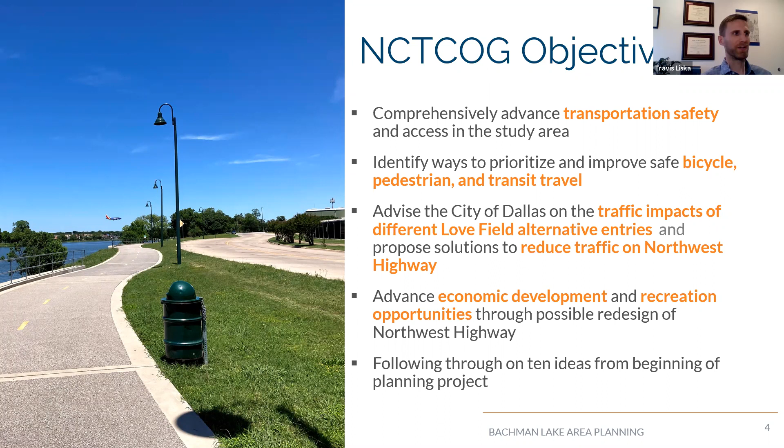Thank you for that introduction, Michael. You really set up a lot of the presentation well.

Today we're going to cover a little bit of that background on the 10 that Michael mentioned, as well as talk about where we've been with the project and where we're going.

We're really going to focus on the public engagement opportunity, a summary of the comments we received from an online map exercise that we made available earlier this year. And as Michael mentioned, we're going to talk about roadway improvement ideas related to possible alternative entries for Love Field. And then we're going to hopefully have time for a good conversation and discussion.

So to start off with our background, we began this planning project almost a year ago. As Michael mentioned, we had the October meeting where we laid out a lot of the items we're going to address. Then we began a public engagement process with an online survey that members of the community utilized and gave input on.

We did more public engagement through an interactive map and mapping exercise that was available this spring. And as you'll find out this evening, our roadways team has been working on modeling analysis related to possible scenarios related to Love Field, which they've been working on this summer, and that's what we're here today to present.

So you heard the mention of the 10 focus areas from October. These are those 10. We want to show you today that we are following through on these items, or will follow through soon. So some of the content from these items will be covered today.

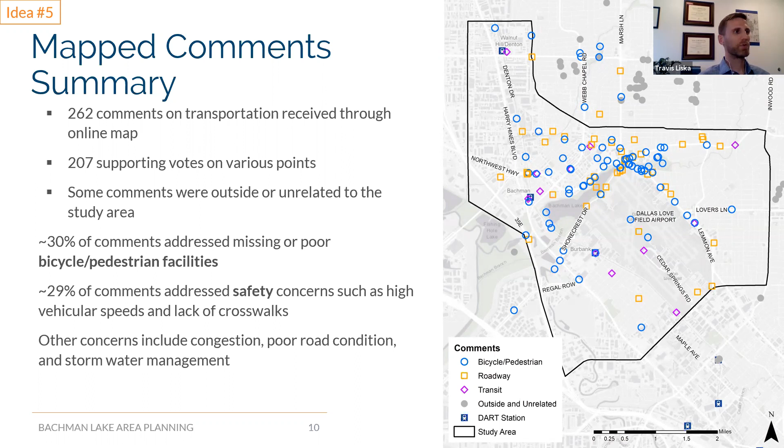So we're going to go into just a few key areas that I think were really the focus of the comment and conversation through the mapping exercise.

The first being the Bachman neighborhood, where, as you'll see from our comment counts that are displayed here - and again, I'm not going to go over every single comment, but rather we will make this presentation available online along with a report that has all of the comments available for you to read at your leisure. But the main takeaway here is really an indication of the need for better bicycle pedestrian facilities, and again a concern over how to safely access them, especially as it comes to the ability to cross roadways where there is a lot of traffic. So those were noted for this area in particular.

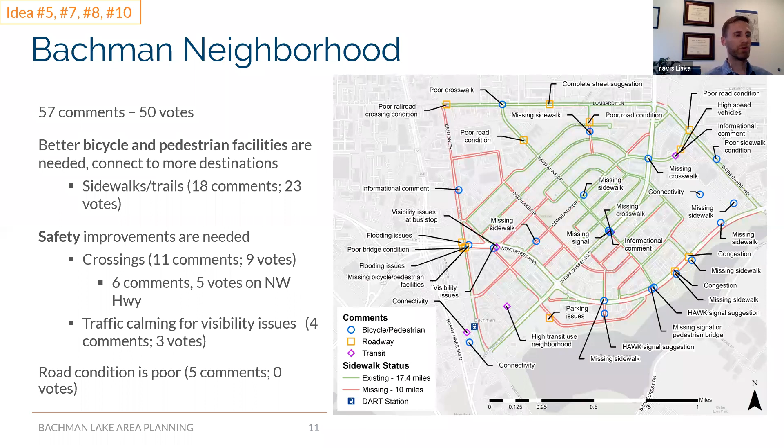And then I want to shift over a little ways to the east on Northwest Highway, where you'll note that there was a lot of comments on missing sidewalk especially. With Northwest Highway having a lot of fast moving traffic, comments also indicated a concern over an ability to safely cross and navigate around that roadway.

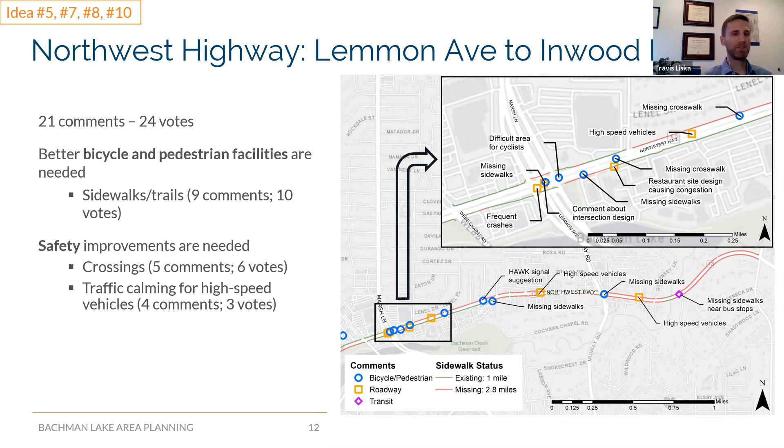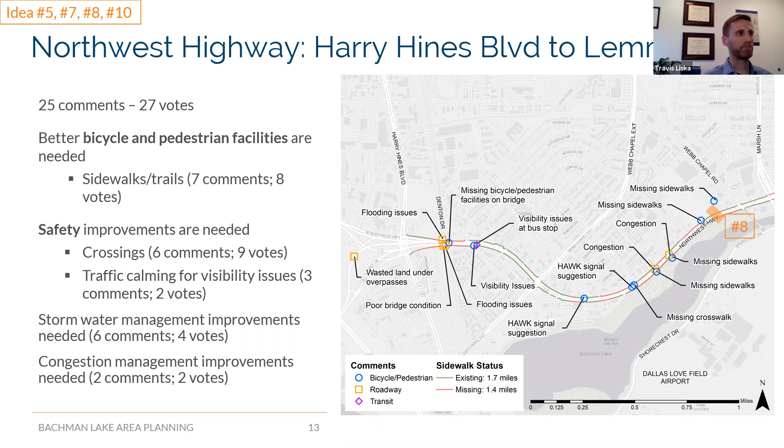You're going to hear from our roadways team on our item 3. Item 3 is this question of access to Love Field, so this is an important location - keep that in mind. We have noted these comments, and we're going to continue talking about this location later in the presentation.

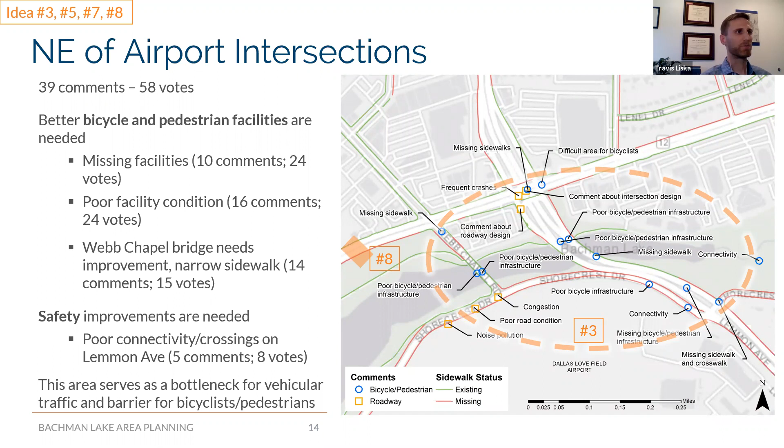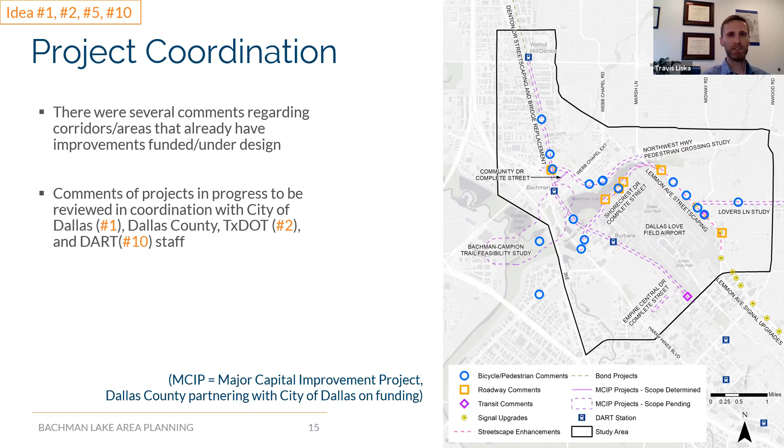I'd also like to note that our goal is to coordinate with our local government partners, obviously the city of Dallas, Dallas County, TxDOT. We received a number of comments on locations that relate to projects that are in some degree of progress with those different agencies, and we're going to take these comments to them and coordinate with them as needed as well.

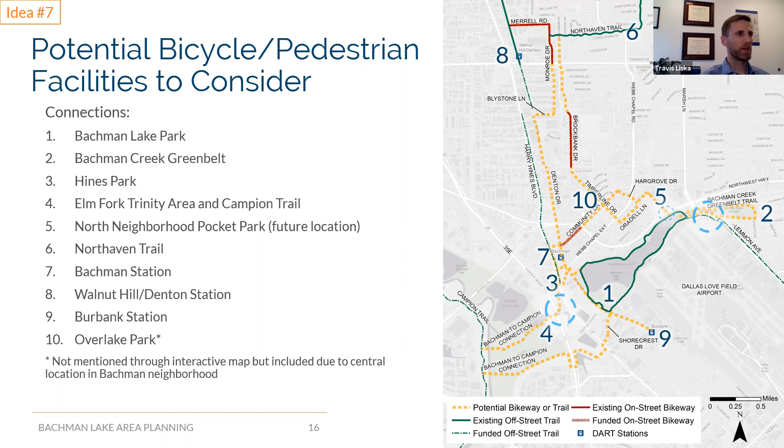In one of the final focus areas from this engagement, we looked at where people are interested in connecting and getting to, especially from bicycle and pedestrian movements, which we've noted on this map. We're not finalizing recommendations this evening—we'll come back to continue refining them, but we're using this input to understand what needs to be improved.

To wrap up our mapping engagement effort, I've got a tally of comments for different areas. I want to reinforce that we heard major themes we already knew something about from our transportation data and prior engagement: there's a need for addressing bicycle and pedestrian facilities, especially safety related to those movements throughout the study area. Major streets have a lot of traffic, which creates a safety impediment—so how do we address the ability to cross those streets safely while also addressing traffic needs?

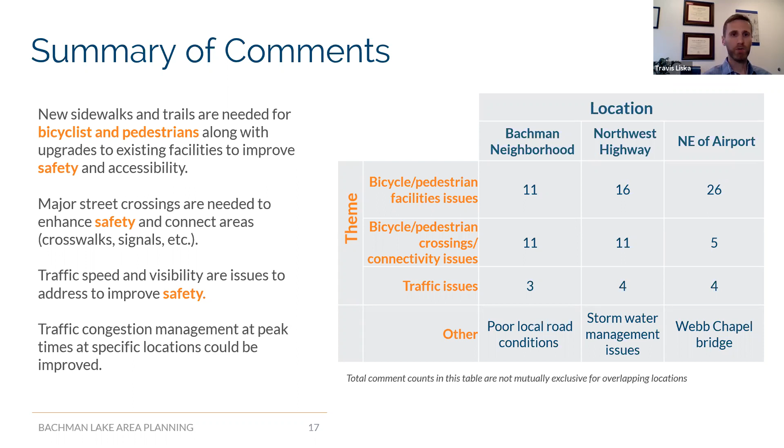I've gone through this pretty quickly, just to give everyone a quick overview. We'll provide a full report of comments on our website—if you want to look over the details, it will be posted at nctcog.org/Bachman area. We'll coordinate with our local government partners to identify recommendations addressing these concerns. That concludes our summary of the public input. These slides will be online for you to review after this meeting.

I want to quickly switch to an idea Michael mentioned earlier: how do we increase recreation access? The next couple of slides show an idea of possibly creating a recreational island feature in Bachman Lake that would host different amenities. As Michael indicated, we'd really like your feedback on this.

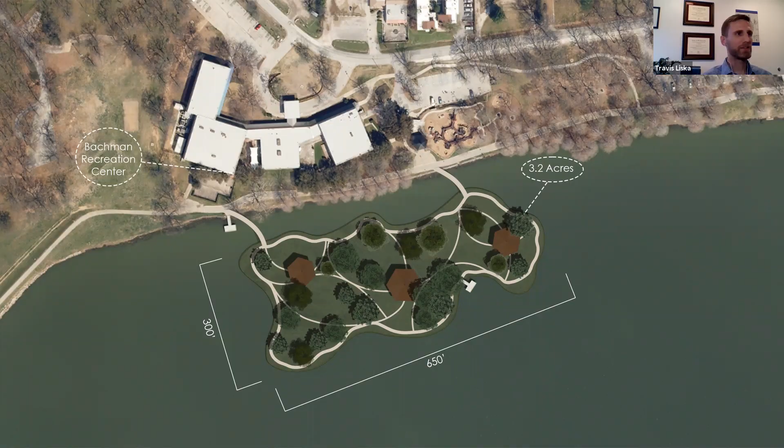We're going to share a link where you can fill out a form to give feedback, or you can provide comments in today's meeting. Essentially, this would be a trail, bike, and pedestrian-only connected facility somewhere in the lake. Here's a rendering of what it could possibly look like. So that's just one idea.

Again, Michael said we want to start the conversation, so please feel free to give us feedback in the chat, or use the link for comments available on our website. If you have questions, we invite you to put those in the chat as well. At this time, I'm going to hand it over to Jeff Neal with NCTCOG to talk about what's going on the roadway side.

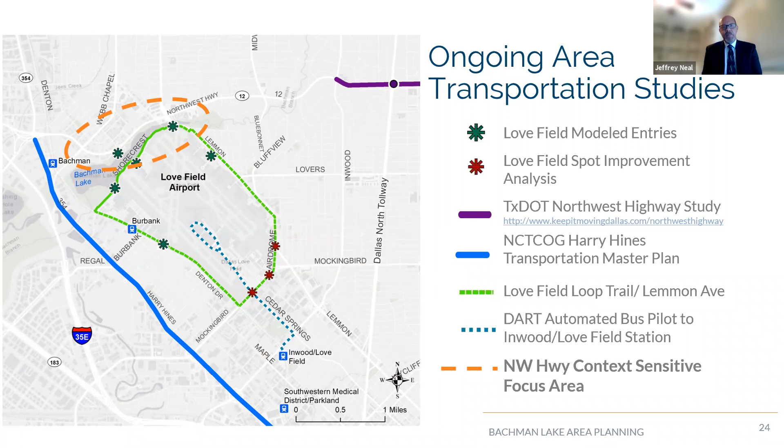Next slide, please. So Harry Hines, interestingly enough, the study that's ongoing here is looking at a master plan to help improve context sensitivity within that area, the need to reduce traffic, and the need to improve walkability and connectability to various land uses.

This is obviously still a very important corridor because it provides access to downtown, to Market Center, and the UT Southwestern campus. So how can we make those areas more accessible while at the same time making that corridor more attractive?

Less impacted by traffic, trying to look at all the various intersections and interchanges along the corridor to see if improvements allow for better traffic distribution and better opportunities for increased livability and walkability in these areas that continue to attract a great deal more people.

You'll notice the northern limit of this study is the intersection with Spur 482 and Northwest Highway, which we want to try to address not only with this study, but with our study. We'll talk about that here shortly.

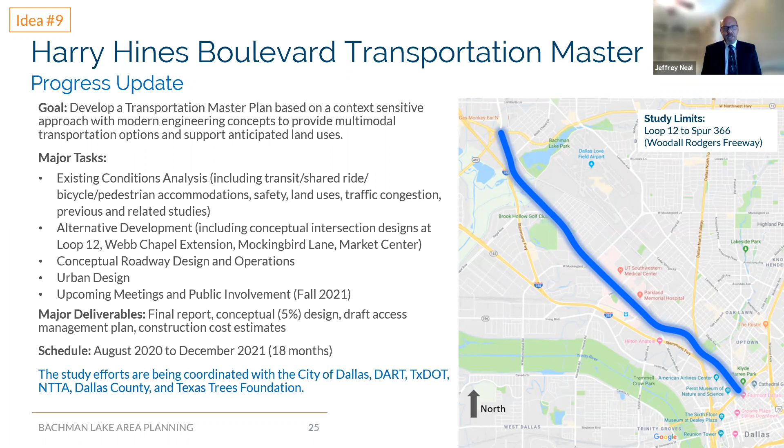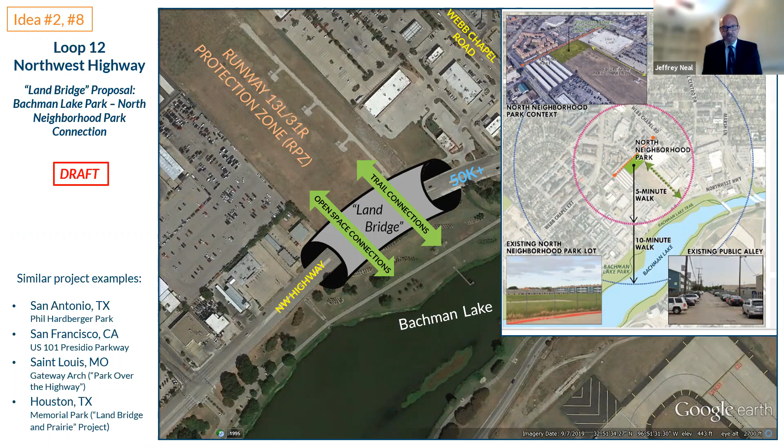Again, these bookends - one being what we're calling the northeast corner of the airport that Travis discussed earlier in his slides. We're looking at the Interstate 35E interchange, known as the Raceway interchange, to see if we might be able to use that as a means to get traffic off of Northwest Highway, but also to provide a more efficient access point to and from Love Field.

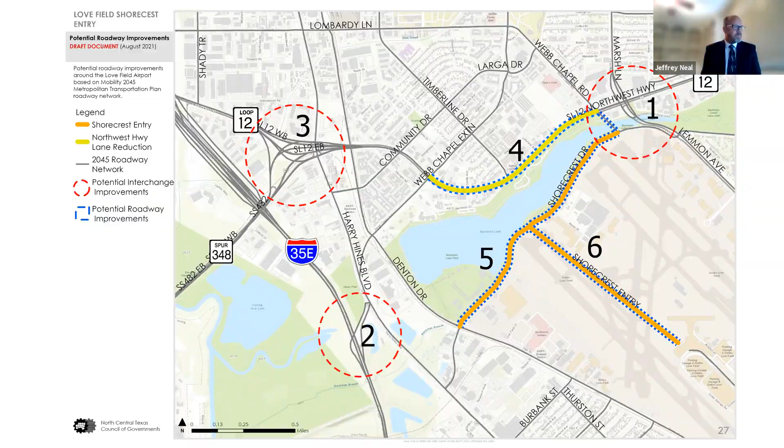Focusing on the northeast corner, our goal is how to reduce bottlenecks where there are already closely spaced intersections, and potentially add Love Field access via Shorecrest. We believe this interchange needs to be a focal point for major improvements, and we've highlighted some potential options to address that.

One option focuses on the Webb Chapel Bridge, shown hatched in blue. That bridge is closest to both Love Field and Bachman Lake, so it's certainly a good focal point. But it's not the only area here experiencing congestion.

It's also where Marsh and Lemmon Avenue connect in an interchange at Northwest Highway. Perhaps that needs to be the area of improvement, so that high volume traffic wanting to access Love Field does so through an area where high traffic loads are already experienced, and we can distribute that traffic more efficiently and safely.

Maybe that requires revising some of the existing ramps, so that Shorecrest can meet up with Lemmon Avenue in its own dedicated intersection on the south side of Bachman Lake.

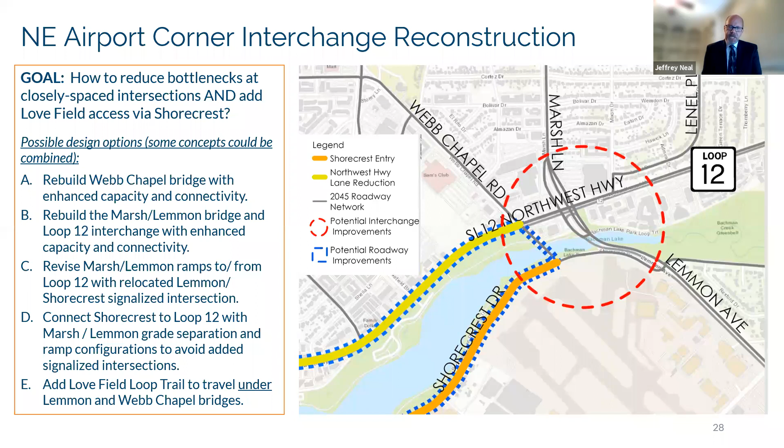As a result, we think it's critical that when the Love Field Loop Trail connects to Bachman Lake, it does so in a way that's grade separated from those movements. We're recommending the loop trail be built to travel under the Lemmon and Webb Chapel bridges as we consider these improvements.

Moving now toward the southwest, looking at the Interstate 35E Raceway interchange. This interchange is unique in that there are ramps right now only to and from the south.

So if you want to go to Love Field from 35E coming from the north, your only choice is to get off at Northwest Highway, which right now is only provided via a ramp coming off after you split to Loop 12. That's a long distance along Interstate 35E without any accessibility to and from the north.

Our idea is to open up that ability at the Raceway interchange so there are ramps to and from the south, but then by adding ramps to and from the north, people have the ability to access Harry Hines and Shorecrest without having to get onto Harry Hines to the north or along Northwest Highway to reach that northeast corner.

We'd also want to make sure the interchange is aligned so that rather than having such skewed, unsafe, inefficient intersections, we try to make those more 90-degree, right angles, increasing the distance between the Raceway signal and the Webb Chapel extension signal.

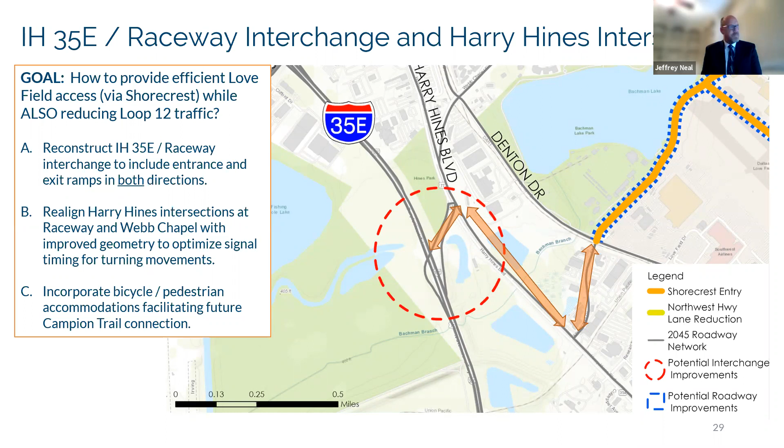Harry Hines was built at a time when it was thought much more limited-access type traffic was going to be using Northwest Highway. That obviously didn't materialize, and now this interchange is overbuilt in terms of its structures and surface area, making it difficult for land to be developed around it and for traffic to circulate in this area.

So what we're suggesting is rebuilding this interchange with a much more streamlined design and less surface area, so it doesn't contribute to runoff that causes flooding issues in this area. With the streamlined design, you eliminate the access control caused by ramps. With more traditional intersections, it becomes possible for development to happen right around those intersections.

So we think that a more traditional design is going to be more appropriate for this area and allow for nearby land to develop. At the same time, we want to ensure efficient movements where they're needed, along Northwest Highway and north-south along Harry Hines. Then as traffic continues to develop coming over from Irving, we'll find a better way to incorporate that traffic within Northwest Highway.

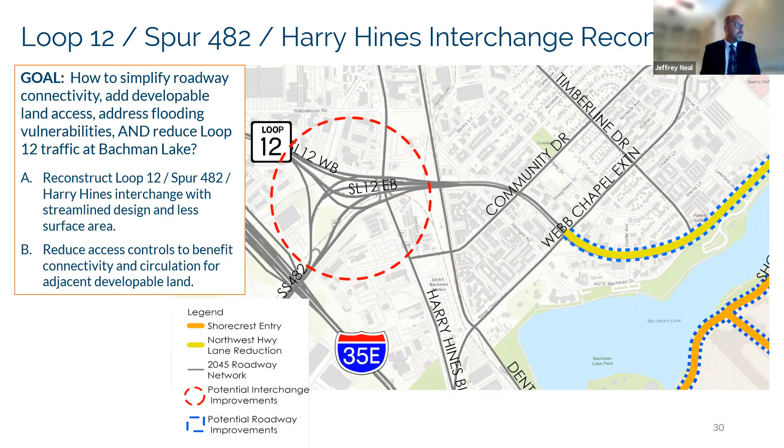The idea is we want to accomplish all of that in a way that also allows us to incorporate the level of traffic we anticipate would want to use, to get to and from Love Field, to and from the north.

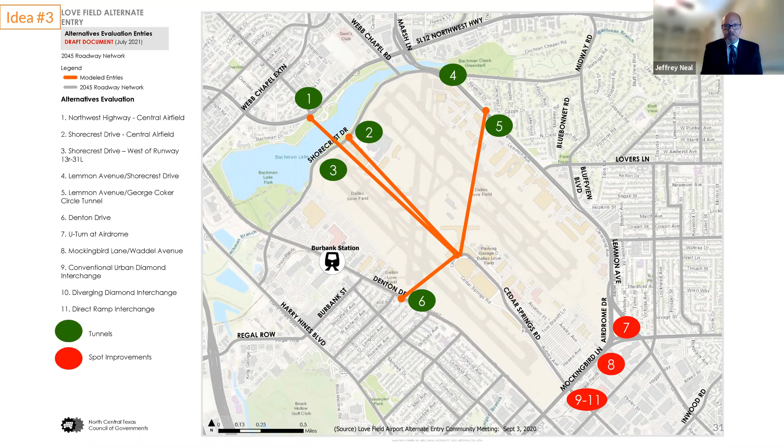So I'm going to turn it over to my colleague, Chris Reed, who will talk about some of the activities we've been doing with our travel demand model to get an understanding of the preferred routes and issues currently being investigated for Love Field access. Chris, please take it away.

Thank you, Jeff. Good evening, everybody. My name is Chris Reed. I'm a principal transportation planner for the North Central Texas Council of Governments, and I'm the manager of the Subarea Studies and Thoroughfare Planning team.

For the last 2 years or so, my team has been working with Love Field and their consultants on the alternate entry airport Love Field study. The map you see here provides a general summary of their preliminary recommendations, similar to a map they showed at public meetings last summer, and which we showed in October. What you see in red is potential spot improvements along Mockingbird. They help functionality on Mockingbird and Cedar Springs, but they don't really address the issues and need for better mobility that an alternate entry would provide.

The recommendations in green were 6 recommendations for alternate entries. In the orange lines, we modeled 4 individual alternatives: Lemmon, Denton, Northwest Highway, and Shorecrest. This map and study provided the foundation for the analysis I'm about to walk you through.

For this analysis, we quickly focused on Shorecrest. We modeled multiple potential alternative entries as previously shown in the study with the airport and their consultants. For this analysis, we eliminated the proposed entries connecting to Northwest Highway, Lemmon Avenue, and Denton Drive.

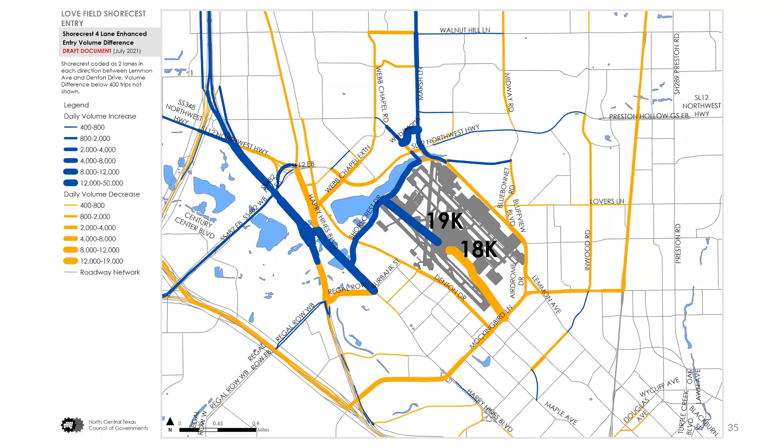So the point is, we're toggling these in computer simulations. The major takeaway here is look at the importance of this new interchange on Stemmons. We're not done yet, we're still building this story for you. Look at the cost to Northwest Highway of not having a fully directional interchange at Raceway.

This interchange is very helpful—it tries to reduce the magnitude of this freeway type traffic being forced to exit at Northwest Highway. Remember, yellow is lower volumes. Look at Harry Hines, Webb Chapel Extension, Northwest Highway.

We're not done yet, but if you toggle a four-lane Shorecrest with a new interchange at Stemmons with a four-lane Northwest Highway—we're not asking you to agree with us, we're just trying to point out an analytical story.

So that serpentine thoroughfare street, probably not a very good idea. Look at the size of that blue. We're not going to pursue that.

Pursuing an interchange, we don't know what your opinion is. We think pursuing an interchange on Stemmons and providing better regional connections, taking the load off of your neighborhoods north of the lake, seems to be an idea that should be explored. Now remember, we haven't talked to TxDOT yet, but it is our responsibility under federal law to plan for the freeway system over time.

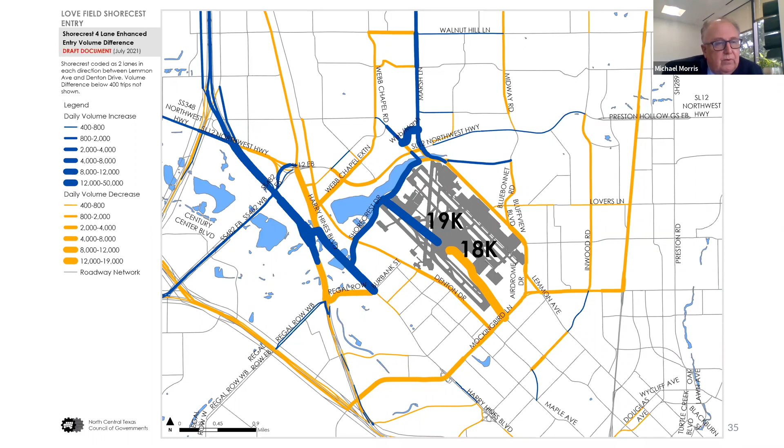So it is not—TxDOT is not going to be shocked that we bring them recommendations to the interstate highway system. Okay Chris, go ahead. Thank you, Michael.

And just to reiterate what Michael said, that's the trial and error of what we're doing. I wanted to call these things out as we go along, because we tweak what we're doing. Before we go to the next slide, focus your eyes on the Northwest Highway, Spur 482, Harry Hines spaghetti interchange, because the next run we did, the final run, focuses on reconfiguring that interchange and also reducing the lanes on Northwest Highway to four lanes between Webb Chapel Extension and Webb Chapel Bridge. So knowing that, focus on that area.

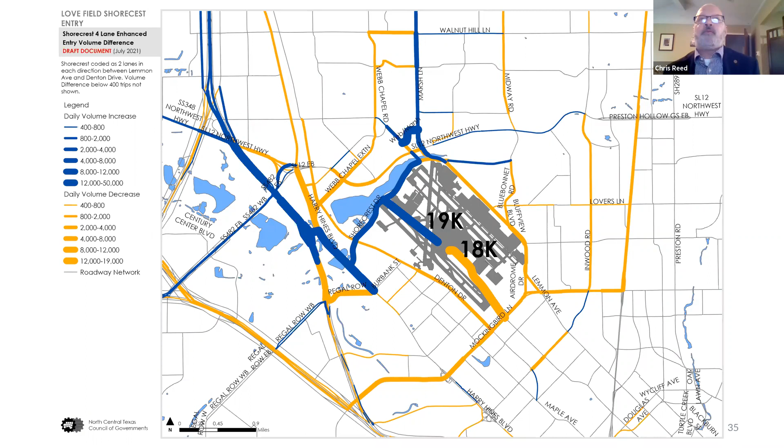And even that number is misleading because the larger reduction is actually west of there—where the spaghetti interchange has been redesigned and the section between Harry Hines and Webb Chapel Extension. But you're seeing a very healthy reduction on Northwest Highway when you put all these pieces on top of each other.

I'm not going to ask Travis to go back to the first slide, but definitely when you compare to the first slide, how scattered it was, where the trips were going—now we've come up with a very streamlined system that not only impacts how traffic is getting in and out of the airport, but all the movements in the area.

And so if you go to the next slide, please. Well, before you do, Chris, I want to go back to the first time we met all of you.

We said, well, you're not having economic development on Northwest Highway in your northwest corner because you're sitting on—we didn't have the term spaghetti interchange at the time—you're sitting on a freeway ramp configuration. So what Jeff is proposing is to eliminate all those ramps back to a traditional thoroughfare street design. You have access off the curb, and you don't have all these ramps to worry about.

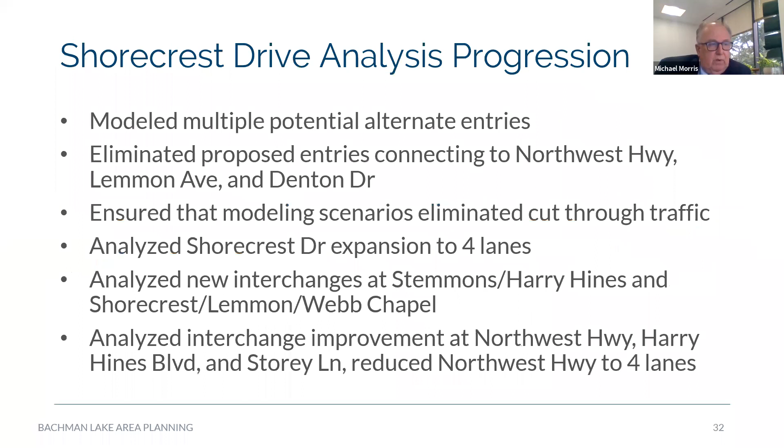So when we got involved, after Chris was working on this, we owe you the volume coming from number 5, the volume from 2, the volume from 1, the volume from 6. I probably would have never had a 1 — I think that's a horrible idea. But we'll go ahead and show those to you. And what you're asking is a very fair question. So why we settled on 2 is because of the results of the work we did previously to widening Shorecrest, putting in an interchange, and so on and so forth. So your question's a fair one.

Now that you understand the efficient regional connections, would you mind if we went back and re-looked at these particular locations? I think the question is very insightful on your part. And yes, we need to go back. We need to show you the results of 1, 2, 5, and 6, and we need to go back and re-examine those particular items, given the question you asked. So I think that's a very fair comment.

Thank you, Michael. The work we did simply said, in the real world, if you're ever going to build an entrance, it's going to be a 2, or it's not going to happen at all. Those results will confirm that based on the volume and the cost of what it would take to make those particular connections. So that is owed to you, and we will go back and re-examine them with those particular improvements. Yes, because if you look at 6, that is more at an angle — granted it's tunneling, but so is 2, and the tunneling on 6 is shorter than 2.

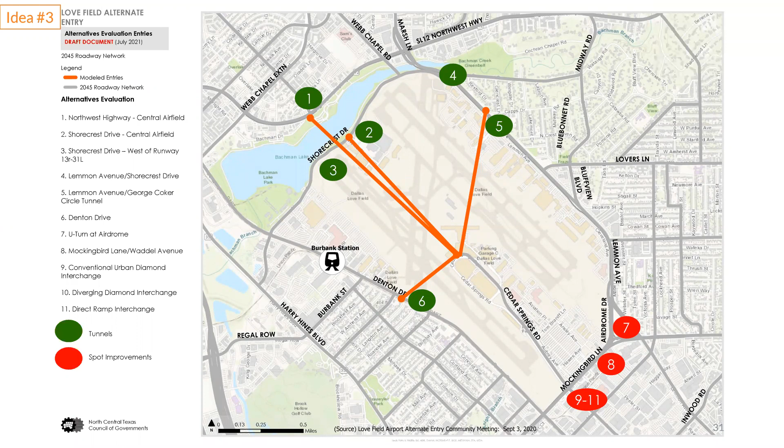I already agreed to it. We don't need to go over it again, right? Thank you so much. So when you keep reiterating it, it's almost like you're trying to convince other people who are listening to you of a particular position. Neither of us is trying to do that today. We're simply trying to show you our results. We're not trying to debate the issues today, just trying to share those results with you. And I already agreed that we will go back and resimulate that.

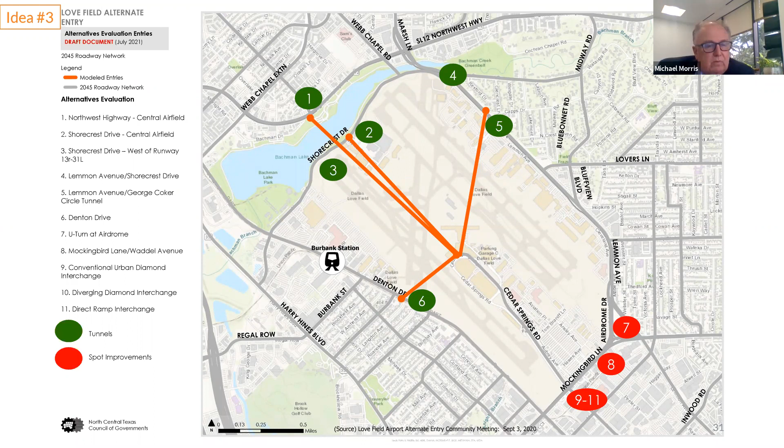The other comment I want to respond to, going back to your original blue and yellow map, is community. The point I'm trying to make is you are not the only community. Here are other Dallas communities. So when someone sees this blue and yellow map, it's possible other homeowners associations or communities think a reduction in traffic on Mockingbird may be a good idea, or on Denton Drive, or on Bluebonnet. So I don't want to be accused of not being sensitive to community, because I think we're showing you a lot of options where we're being sensitive to community. As we take this to TxDOT, I don't think they're necessarily going to be as excited as we are, or you are, on some of these particular options, is my guess. But you're not the only community.

One of the things we have to think through is if 50% of the people in the real world don't want to travel all the way around and come in the southern entrance, in a post-Wright Amendment Love Field, which moved from a business airport to one of multiple destinations, with more families traveling to New York and Los Angeles and a whole bunch of other places. We did the pre and post Love Field travel survey. You are getting lots of people wishing to travel on Southwest Airlines coming in on the northern side of the airport. So yes, I think there's lots of improvements that can be made to Mockingbird, but I'm not asking you to accept this — 50% of the people have no interest in traveling all the way around the airport whenever they want to go. So we have to think that through. I'm not asking you to necessarily think it's great, but other communities in Dallas may think it's great.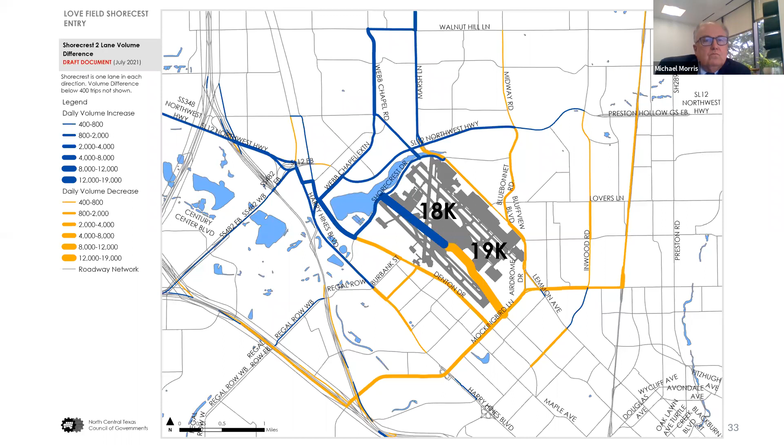We have another question asking whether the analysis done on Northwest Highway in the Inwood to Preston section, which is the TxDOT study to the east, has been updated to reflect possible impacts of Love Field traffic on the tollway. So the question here is, have we updated this? No, we have not talked to TxDOT on any of these findings until coming here. So where did we end up?

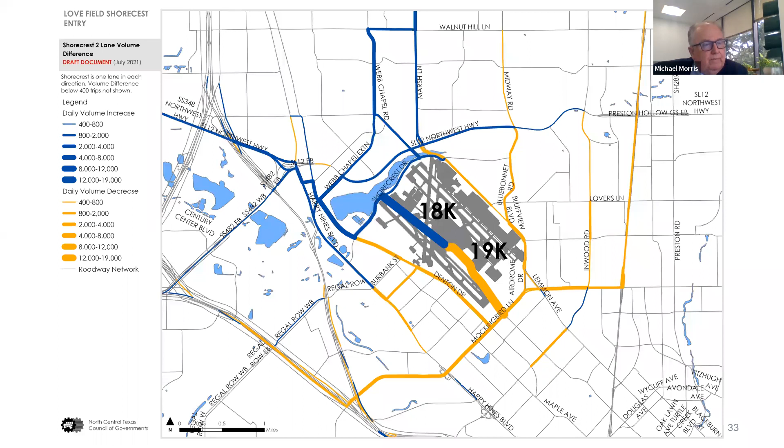Go to the last iteration. So you see we're not adding traffic on Northwest Highway east into that section east of Inwood. We still are seeing the traffic coming down Marsh Lane. We are asking questions about that. Jeff and I are working on why we aren't getting more of that orientation from the Dallas North Toll Road. We're still examining that, but no, we have not sent these traffic numbers over. But east of Marsh, you're not seeing very much yellow.

So we're not influencing a lot on Northwest Highway east of there. Now, back to toggling, if we go to a 4-lane section over on that particular section, then we may be requesting TxDOT to extend their Inwood work all the way across. So we will know soon. We'll meet with TxDOT pretty soon and see if they're warm to the solution of a 4-lane Northwest Highway and getting rid of the spaghetti interchange and building a new interchange. We'll be meeting with them in the next 30 days and see what their reaction is. But we have not systematically toggled these results yet with the other results that Jeff talked about in the beginning.

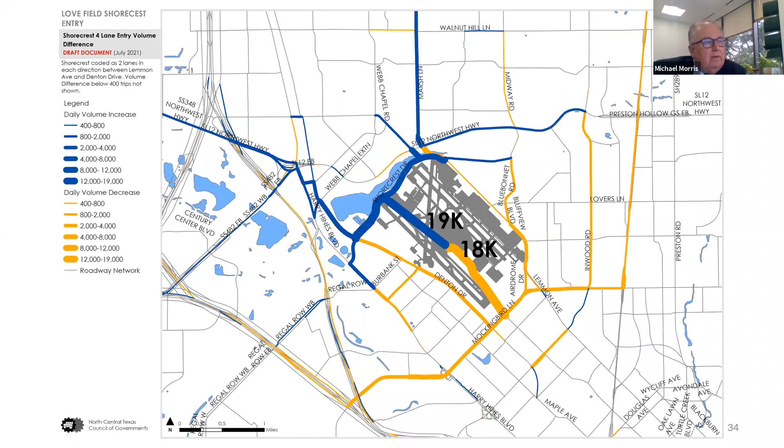Another question specific to the model run: were there any model runs that did not include the Webb Chapel Bridge over the lake? Not yet, but we would explore that. So you see the S serpentine that Jeff tried — we don't think that's a good idea, it's overloading.

Regardless of what you do on Shorecrest and regardless of what you do on the airport, we got a mess on Northwest Highway at these two locations. So the most recent idea we had is to maybe move the bridge to the east side of Marsh. We haven't done any more simulations on that yet. It's a horribly complicated item.

One of the items is, could you not connect Shorecrest to Northwest Highway at Webb Chapel? Could you bring Shorecrest underneath Marsh, not connect it there, and bring it up to Northwest Highway instead? Then if you want to go to the airport, you'd come through the intersection of Northwest Highway and try to provide better levels of service. So all of the above has not been resolved yet at that location.

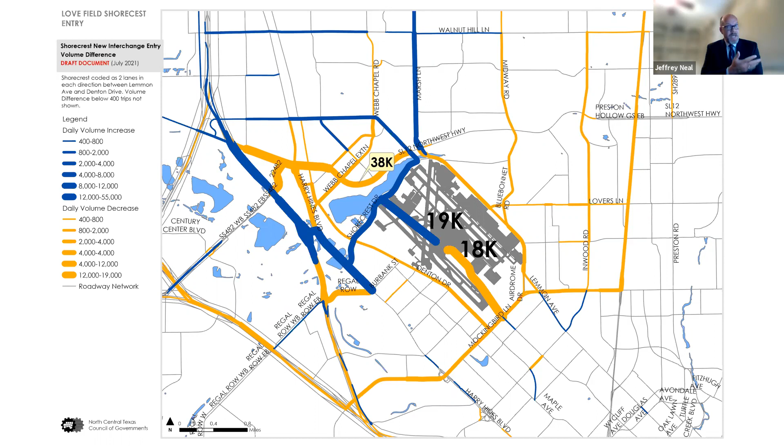Michael, if I may, this connects to a later comment about how, in this model run, Webb Chapel flowing into Lombardy resulted in higher volume. That's a consequence of connecting Shorecrest to Webb Chapel. As Michael just suggested, if we look at connecting something east of Marsh Lane instead, by not having that direct link at Webb Chapel, the traffic increase you're seeing on Lombardy in this simulation might not materialize. So we think we might be able to get rid of that traffic by potentially looking at an east side structure.

I'm thinking, I could be wrong, I can't speak for the lake people, but would an east side structure be looked at as more positive, so you don't see the Webb Chapel structure when you're on the lake? If you put it on the other side, is that seen as a positive or negative thing?

But we may want to tee Shorecrest into Northwest Highway on the east side without a connection to Marsh, to support Jeff's point, so you're not forcing any through traffic to occur. It would all occur on Northwest Highway, east of our 4-lane section.

What's the next question, Travis? I want to highlight a quick clarification Tim asked: we mentioned an improvement east of Marsh and Lemmon - where would that go? We're pulling the aerial photographs to see what it looks like. We're looking at options that don't affect any residential areas. We didn't want to delay this and push it into September, so we'd rather share our results to date, even though we still have homework to do.

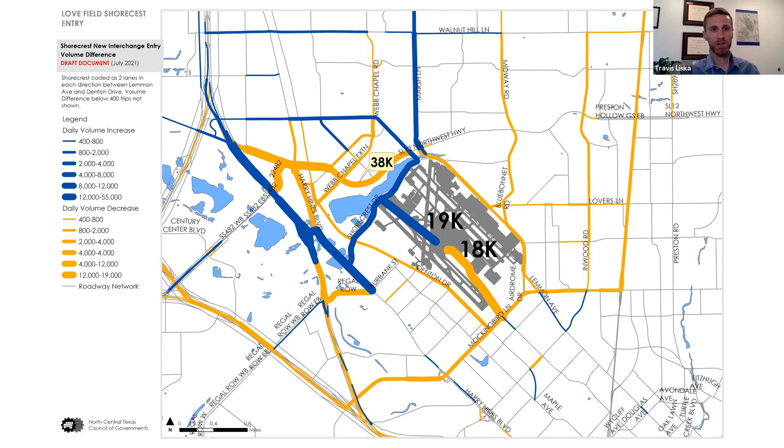I know from our side, we identified there needs to be sidewalks there at least. The reason to go to 4 lanes is not only to reduce traffic, but turn the remaining right of way back over to the pedestrian. This is the walkable, however wide sidewalk Carla and Travis can get for us, with trees and context sensitive design. How do you put pedestrians on both sides? Bike on one side, pedestrian on the other.

We haven't designed that yet. We have to take this idea to TxDOT, the tunnel or cap that Jeff is talking about. You'd probably put the cars in the tunnel and bring the pedestrians up top so they can access the park, creating this ribbon of pedestrian activity, especially on the north side of Northwest Highway, more important to me than the south side. Collect all these humans north of Northwest Highway who are currently risking their life to cross, based on our own observation and the data received.

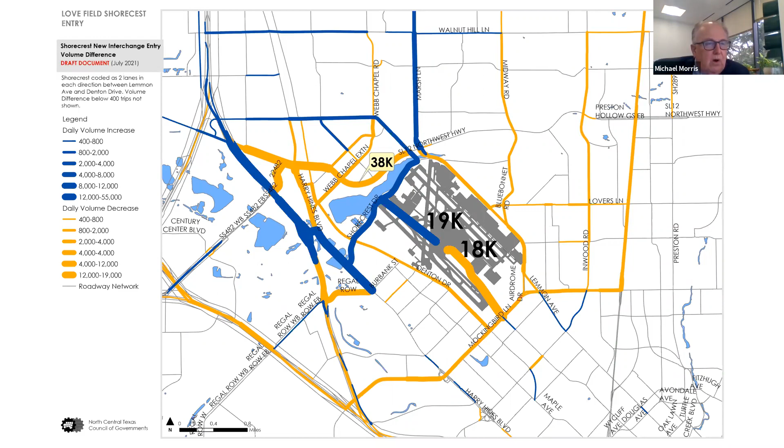You can funnel them across by building a continuous bicycle facility and sidewalks, taking them across this pedestrian cap that Jeff is describing, back into the Bachman side improvement. Jeff is identifying all these new park plans being planned on the north side. Then Travis, who's been waiting on the roadway connections, can go back and make the regional bicycle network connection. So now Travis can figure out how to connect all this to the regional network. Will any regional network connections come across Jeff's new pedestrian cap, or will they come through other facilities?

But the answer is, it's probably not a bus lane, I don't think it's a transit thing. I really think it's turned back over to the humans. That goes back to my original comment 10 months ago: in a post-COVID-19 world, can we make Northwest Highway, instead of 10% for the neighborhood and 90% throughput, into 40% throughput and 60% for the neighborhood? That's what we're trying to do here, to reshape the community level effort.

It would be trees, sidewalks, brick pavers, lighting, and we're not dragging them through the tunnel. We'd have to get them up to grade at ADA compliant levels and bring them through on the north side of Jeff's pedestrian cap. But we have to first hear, are people interested in this or not? And then we have to see what TxDOT's interest is.